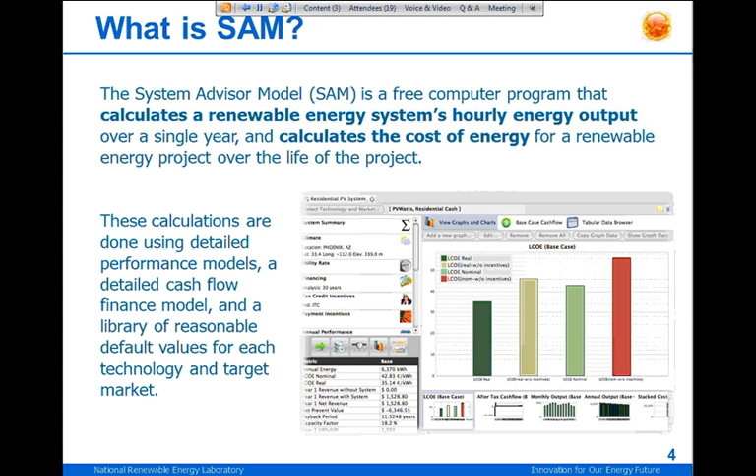So SAM is a computer program, and it's designed to model renewable energy projects, and it basically combines a performance model that calculates a renewable energy system's electricity production over a year with a financial model that calculates a project's cash flow over a period of several years. And using the results of these two models, you can evaluate the financial feasibility of a renewable energy project.

SAM can model a range of renewable energy technologies, photovoltaics, concentrating solar power, so parabolic troughs, power towers, and so on, and wind, which is what we'll be discussing today, and also geothermal and biopower systems. SAM's performance and financial models are based on, or adaptations of models that were developed either in the National Laboratory System at NREL or Sandia or others, or at some universities. And these models, before SAM was around, were basically used in-house as research tools, and SAM has made it possible for those models to be used by the general public.

And one of the main purposes of SAM is to make it possible to model different types of renewable energy systems using a consistent set of financial models. So you could compare a wind power system to a solar power system, for example, and know that the financial metrics that you're using to compare the two projects are consistent because you're using the same financial model with different performance models.

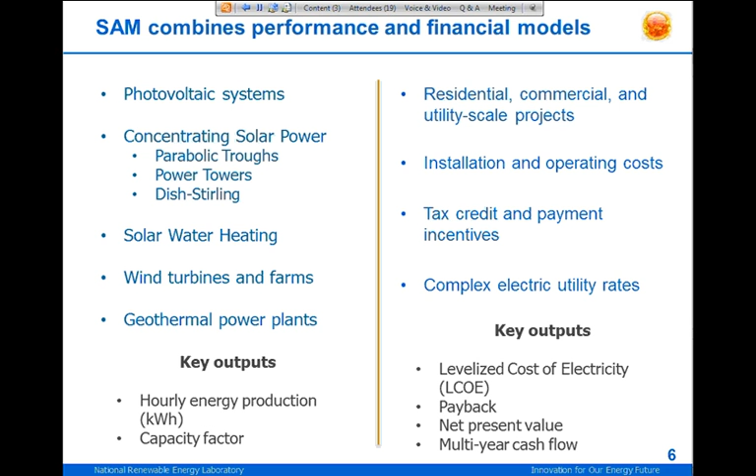This slide just illustrates the dual nature of SAM, that it has a performance model, which is here on the left side. This is a list of the performance models that are included in SAM. And then the financial model, which is here on the right side, shows you the kinds of projects you can model in SAM, so residential and commercial, and also utility scale projects. And then of course, the financial model handles project costs, incentives, debt structure, and those sorts of things.

So SAM is developed by the National Renewable Energy Laboratory with funding from the Department of Energy, and we partner with Sandia National Laboratories and other institutions. And we have well over 35,000 downloads of SAM by a range of different kinds of institutions and individuals.

Just in case you haven't done this yet, to download SAM, you go to the SAM website, sam.nrel.gov, and you have to register on the website before you can download SAM. To register, you just complete a short form, and then you can log on to the website and download. So when you're logged on to the site, you'll see a list of links to download SAM. Again, SAM is free, so there's no charge for downloading or using SAM.

All right, one more thing is we've got a bunch of resources to help you learn to use SAM and help you when you have questions as you're using it. The first line of defense is the help system in SAM. There's a help system integrated with the software. You can press the F1 key in Windows or this question mark button in the user interface to open the help system. The SAM website is also a good source of information about SAM.

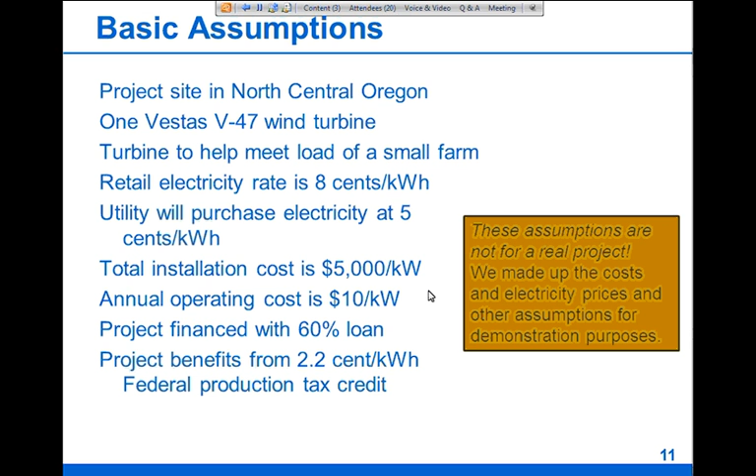I'm assuming an installation cost of $5,000 per kilowatt, and it costs $10 per kilowatt annually to operate the wind turbine. And then I'm assuming that the project is financed with a 60% loan, and that it can take advantage of the federal PTC. So these are the assumptions that I'll be putting into the model. So let me move this aside and get SAM up.

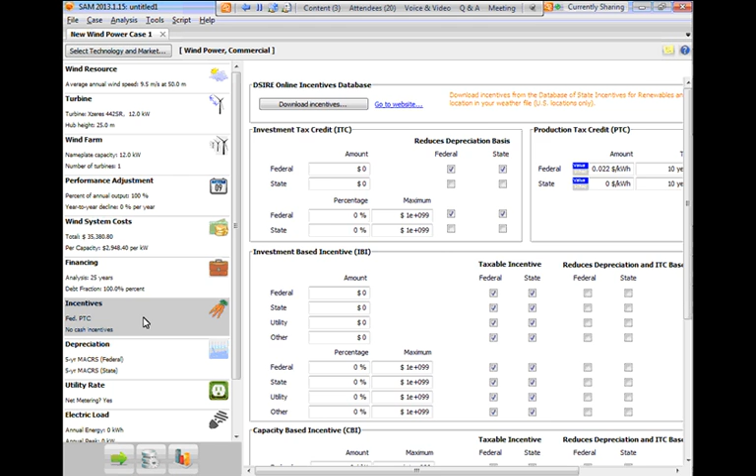So I have a case called New Wind Power Case 1 here. And on the left side of the window here is a navigation menu with buttons that you can click. And as you click the buttons, SAM displays different input pages. So you can see that there are a lot of input pages and that each input page has a lot of inputs. But you'll also notice as I'm flipping through here that all of the inputs have default values in them. So right when you start, from the time you create your file, you're actually ready to run a simulation.

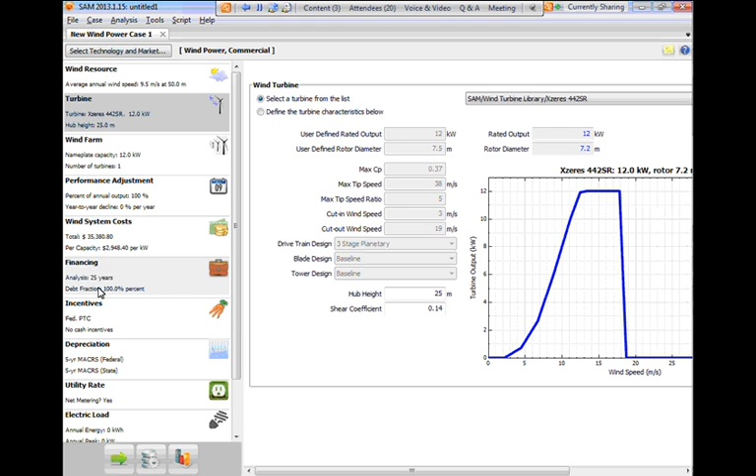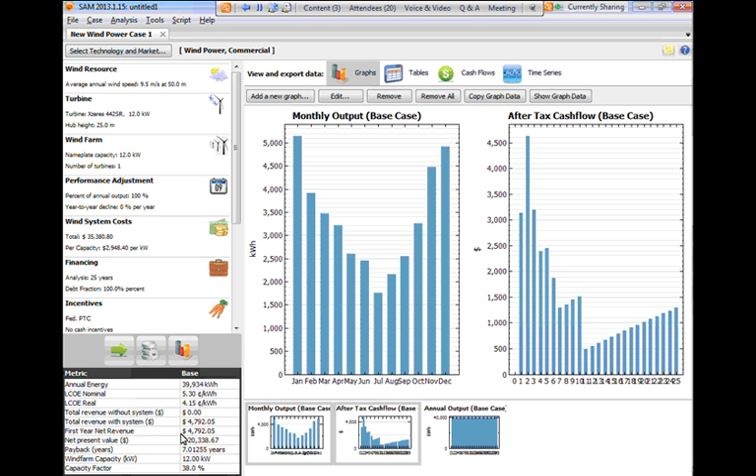So I can just click Run here, and I have results for the default commercial wind system. So I haven't entered any values here. I'm just working with the default assumptions, and get a system with reasonable results. So if you're just getting started with SAM, you can just start with the default system and start changing different inputs to familiarize yourself with them. And again, check help for details about what the inputs mean. There's a lot of information in help.

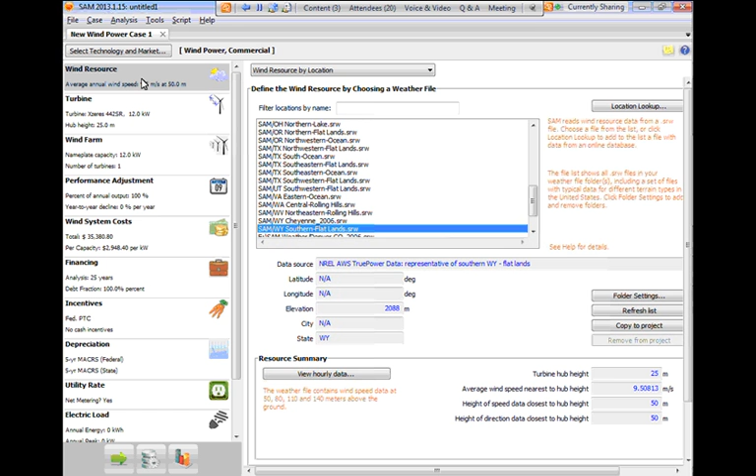Okay, so for our system, I mentioned that it's in north central Oregon. So I'm going to start at the top of the navigation menu with the wind resource button. This is where I tell SAM what wind resource data to use for the project. And I'm going to make the screen a little bigger here so you can see it. We've got a few options here for wind resource data. What I'm going to do is use one of the files that are included with SAM. These are what we call typical wind data files.

And they're data for specific locations in the U.S., but that we've sort of chosen to represent the range of types of wind resource that you might see in the U.S. So these files are okay to use for a very preliminary analysis before you've started collecting data, if you just want to get a sense of what the wind resource might be like at a given site. Obviously, you're not going to want to make any financial decisions based on these typical weather files.

For my example, I'm going to use the typical weather file. In Tom's example, he's going to use what we're calling now location lookup, which provides access to a different set of weather files. So you'll see that in a moment. It's also possible if you have your own wind resource data, if you have measured data, to create your own SRW file. So that's a text file with wind resource data in it. And there's instructions for how to do that in help.

So for now, for my system in Oregon, I'm going to type OR here to filter the files, or just show the files that have Oregon in their name. And I'm going to use this Oregon Northern Flatlands file, because that roughly represents the kind of terrain where my wind turbine is.

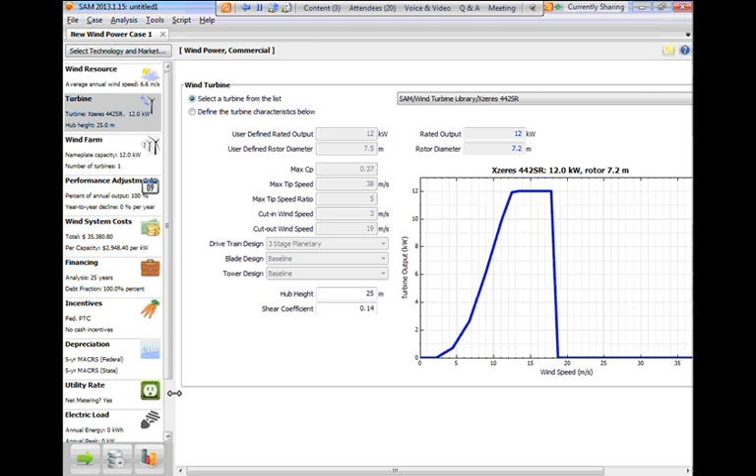All right, so now that I have my wind resource data specified, I'm going to pick a turbine. So I go to the turbine page. I'm going to use the select turbine from our list option, which is the option that you're going to want to use for most project analysis. And that gives me a list of wind turbines. And I mentioned that I was going to use the Vestas V47. So I'll go down here. There's Vestas V47, and that's all I have to do. I have the power curve of the wind turbine.

And you may have also noticed here that SAM displayed an error message in red. It's telling me that the hub height is too low for the rotor diameter. So this turbine has a 47-meter rotor diameter, and the default hub height is 25 meters. So the tower is shorter than the rotor. That's not going to work. So let me give it a hub height of 50 meters. And now the message goes away.

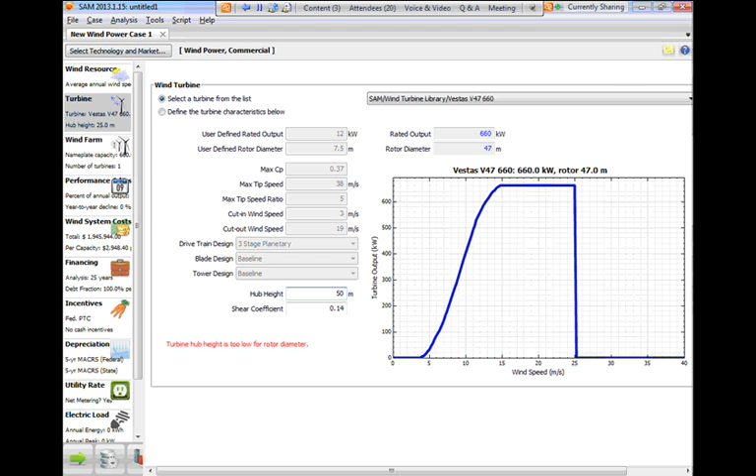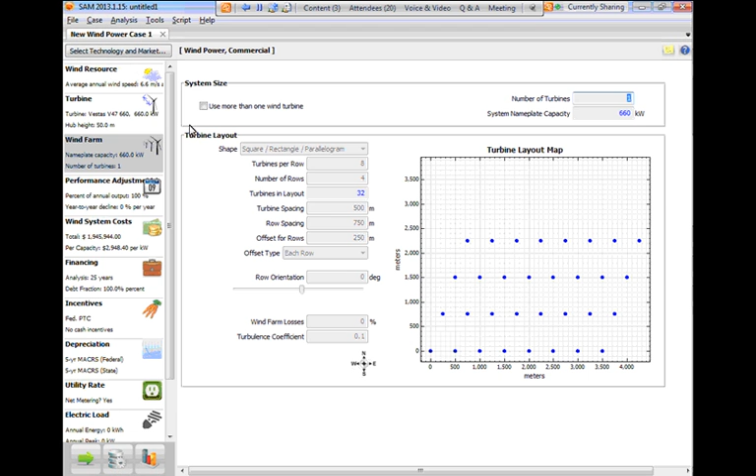And then I'll go down the list here to wind farm. This is a single turbine, so I want to make sure that use more than one turbine is clear. This checkbox is clear. Number of turbines is 1. And then I can just ignore the rest of these because I'm not laying out a wind farm. Tom, again, will show us how to do that when he models a wind farm.

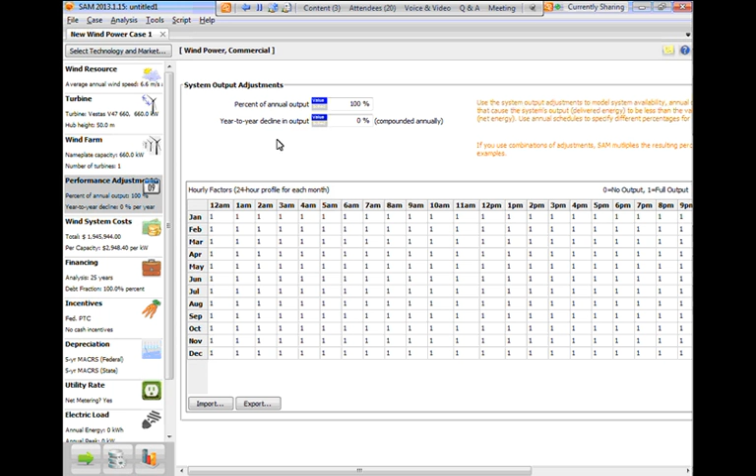The next set of inputs are these performance adjustment inputs. I'm going to ignore them for this example, but just so you know, these are here so that you can model the effects of curtailment. If you're required to shut the wind farm down during certain times of year by the utility, or to account for downtimes for maintenance and that sort of thing, you can use performance adjustment inputs to account for that.

All right, wind system costs. I'm not going to skip that. That's an important input. And the way we have the default set up for the commercial wind power system here is that we're just using a single cost to represent the project's installation cost. So you'll notice there's a bunch of categories here: turbine costs, foundations, infrastructure, and then we've got some indirect costs. And they're all set to 0 by default, except for the turbine cost.

So SAM only uses one number to represent the installation cost, and that's this total installed cost that you see down here under total installed cost. SAM calculates this number by adding up all of these different cost categories. And so it doesn't really matter how you assign costs to the different categories, as long as the total installed cost is what you expect it to be for the project. So to keep things simple, we've just used the turbine cost to represent the total cost, and then we've added an 8% contingency cost here.

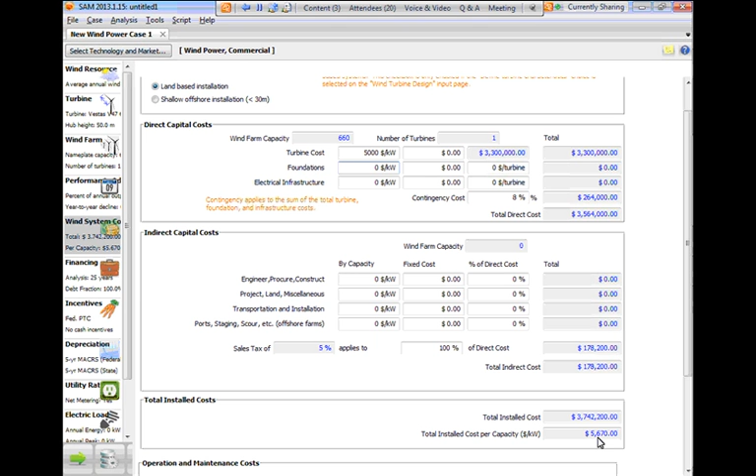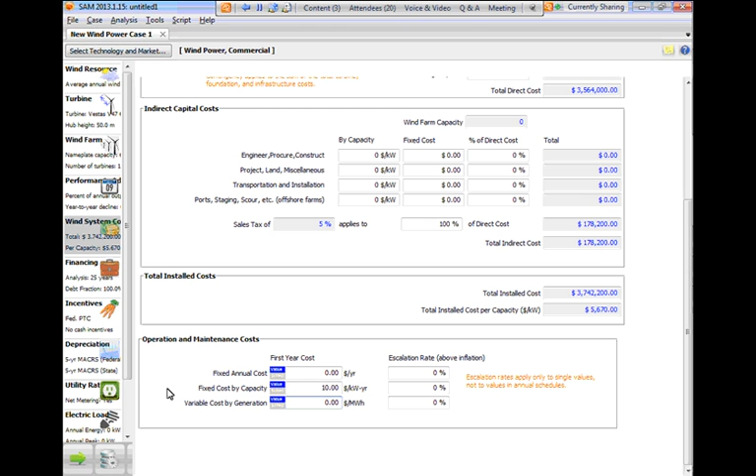So I said that the total installation cost is $5,000. And then that gives me a total installed cost of $5,670 per kilowatt. And then I also mentioned that the operating cost is $10 per kilowatt per year. So I'll put that down here. You can also enter O&M costs in different units, so as dollars per year or dollars per megawatt hour. Okay, so we need to tell SAM both what it costs to install the system and what it costs to operate the system. All right, so that's wind system costs.

Next, we go to financing. And here, the only detail that I gave about financing when I listed the assumptions was that the debt fraction is 60%. So it's a 60% loan. And for now, I'm just going to go with the default values for the other assumptions. Obviously, these are important and are going to vary from project to project. But just to get me started, I'll say I have a 60% debt fraction, and I'll use the 7.5% interest rate for the loan. And then we've got inflation and discount rates here, which SAM uses to calculate net present value and levelized cost of energy. And then I've got some tax assumptions here, and I'm just going to go with the defaults.

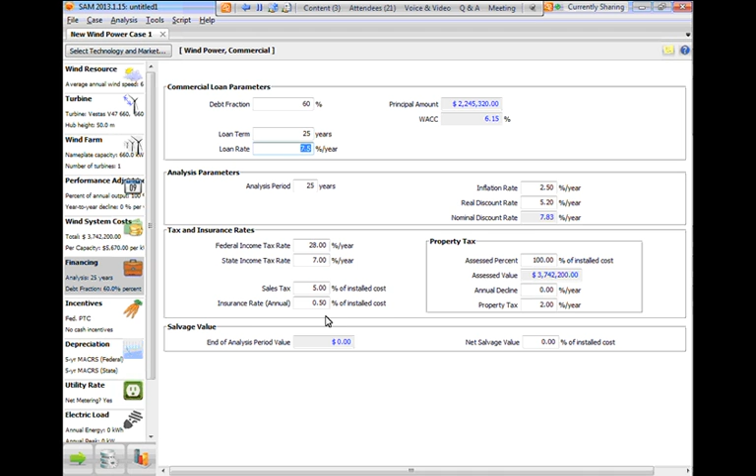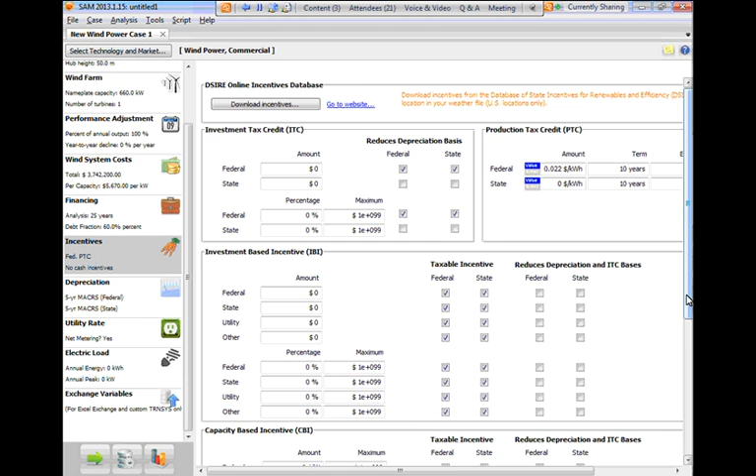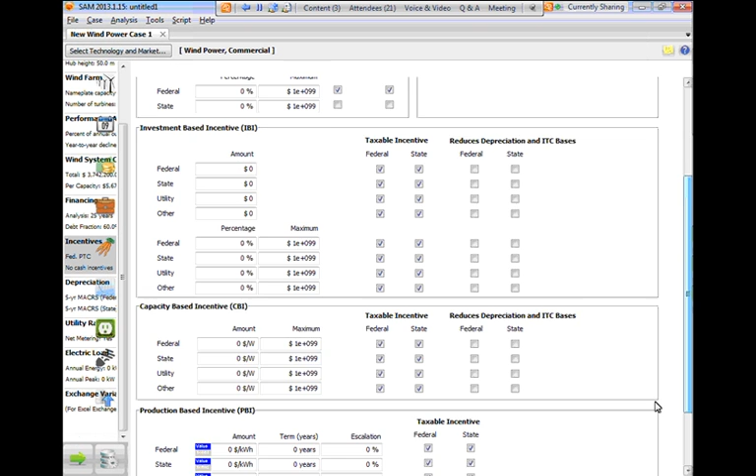And then for incentives, I said the project benefits from the 2.2 cent per kilowatt hour PTC. That's in there by default under PTC. And you'll notice there are inputs for a bunch of other incentives, which are all set to 0 by default. So for a project like this, a wind turbine on a farm is likely to benefit from a bunch of other incentives. There are probably state-level incentives. There may be federal incentives, for example, from the USDA that apply to agricultural facilities. The county may offer incentives. The utility may offer incentives. So you can put the whole package of incentives that the project can benefit from in these inputs. I'm just going to keep things simple now and assume that only the PTC applies.

Now, I want to take a quick moment here to talk about the DSIRE database. This is a website that lists renewable energy incentives for each state in the country and also for federal incentives. We can see the website by clicking the link here. Go to website.

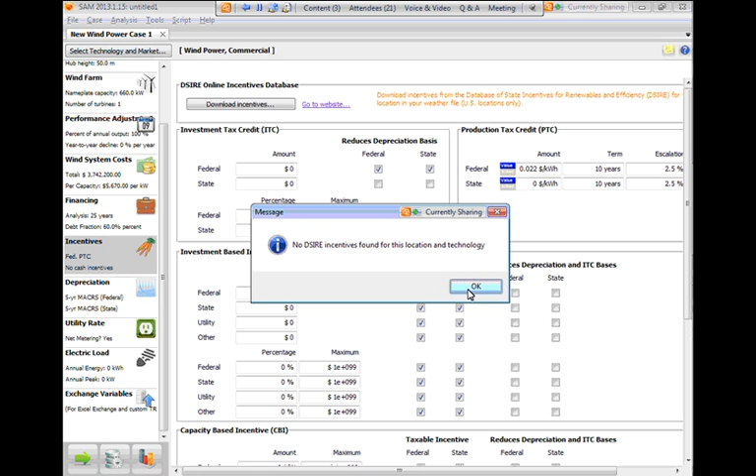That's SAM's way of telling me that it doesn't have location data for the type of weather file that I used. So when you click download incentives, what SAM does is it goes to the wind resource data and looks for the latitude and longitude to figure out where the project is. But since there's no latitude or longitude data in this particular data file that I chose, SAM doesn't have the information it needs to download the incentive data. So these typical wind data files that come packaged with SAM don't have location information. But if you use location lookup, as Tom will show you in a moment, then you will have latitude and longitude data, and then the download incentives button will work.

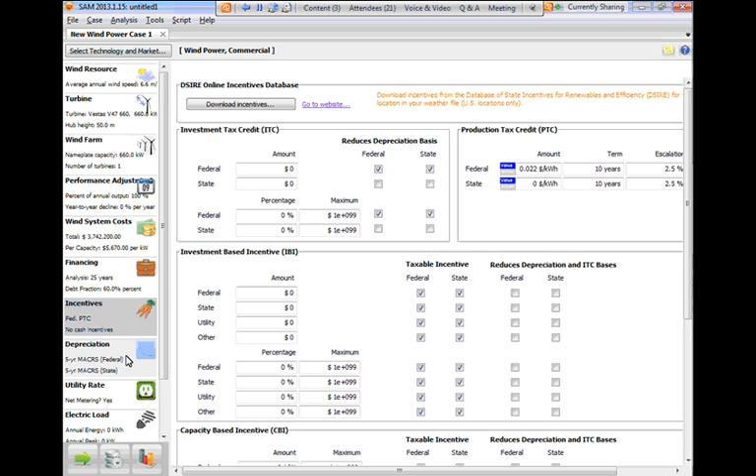All right. Next, let's look at depreciation. So that's the next window. And I'm going to go with the default. So this farm is a commercial entity, and I assume that it can take advantage of the accelerated depreciation under IRS rules. And we're just going to go with the 5-year schedule.

Okay, now we get to the utility rate. So remember I said this is a project that's buying and selling power at retail rates. So on the utility rate page, we tell SAM what the rate structure looks like. I'm going to use a simple rate structure, again, that I just made up. So I'm going to go through and clear all the checkboxes for these complex rates. I said that the farm buys electricity from the utility at 8 cents per kilowatt hour, and that the utility is willing to buy extra electricity that the farm generates at 5 cents per kilowatt hour.

Again, we have an automatic download from an online database feature for the utility rates. So if you click that button, then SAM tries to get in touch with a server, which it often can't do on its first try. So if you get that message, you just try again, click refresh, and usually it comes up the second time. There we go. There's a list of all the utilities in the United States, or at least a whole lot of them. And if I filter the list there by typing Oregon, there's a list of utilities that happen to have the word Oregon in their names.

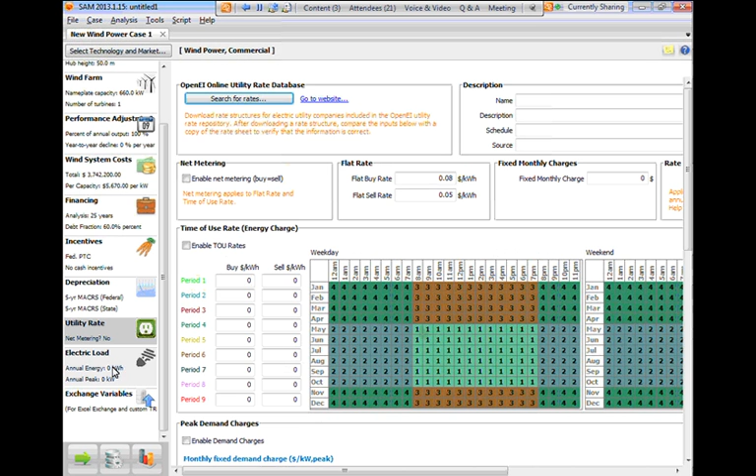If I'm modeling this kind of a system, since I've got a different buy rate and different sell rate, I need to give SAM some information about the electricity usage of the farm. So that I do on the electric load page. And I'll be the first to tell you that the electric load page is a little tricky to use. So if you're working with electric load data, feel free to get in touch with us via the forum or by email. I'm going to show you how to work with one of the sample load files that we include with SAM.

So here goes. And I'll also mention that for the steps that I'm walking through here, obviously you'll be able to refer to the video when we're done to look back at what I'm doing. But I also will be posting a PowerPoint presentation that kind of steps through what I'm going through here. So don't worry too much if you're not following all the steps. I'm about to launch into a bunch of complicated steps.

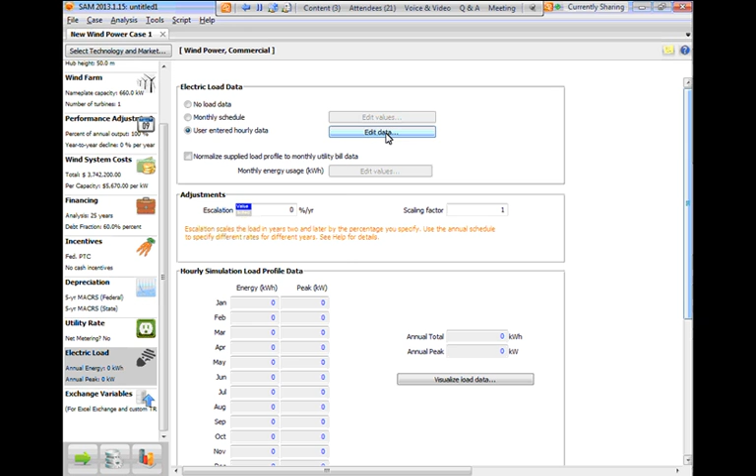To load a file of load data, I click user entered hourly data here, and that makes the edit data button active. So then I click edit data, and then I click import in the edit data window, and I navigate to this folder in the SAM installation folder. So by default in Windows, SAM installs itself in C:\SAM

2013.1.15. And then in that folder, there's a folder called Samples, Simulated Electric Load Data, and it has a bunch of text files. These text files are just a single column of hourly electric load data in average kilowatts per hour. And I'm arbitrarily here going to choose Medford. I think Medford is the town in Oregon, so I'll just use it for fun here.

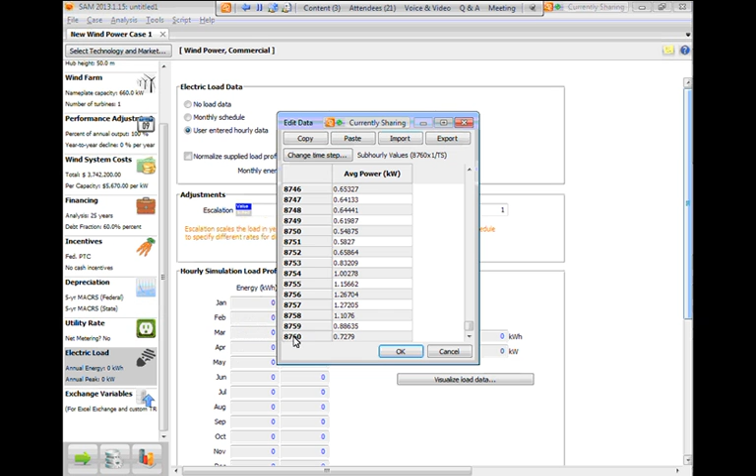Basically, in order to model load data in SAM, SAM needs a set of hourly data. So I need some kind of hourly data file to use. So I'm just going to use this Medford text file. There's the hourly data from the file. So you can see it goes all the way to 8,760, which is the number of hours in a year.

When I click OK, then this table of monthly values is populated. So I can see the monthly energy and monthly peak load. And then I see the annual totals here. Now my farm has a much bigger load than this. So I'm just going to scale this hourly data up by a factor of 100. So I put 100 as a scaling factor. Whoops, not 1,000.

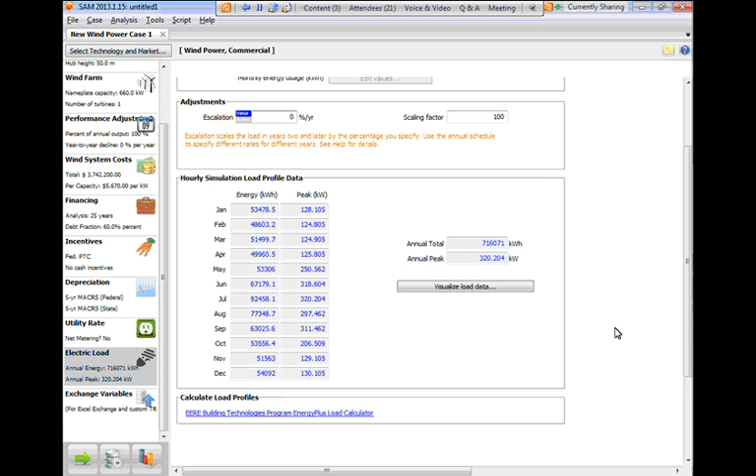And now the annual peak is 320 kilowatts, and this farm consumes 716,000 kilowatt hours per year. I'm going to just use that as a first approximation of the farm's load, and call things good. So now I've put in values or reviewed the values on each of the input pages. I'm ready to run, and this green arrow button is the run button. So I click run, and SAM just did a year's worth of hourly simulations and displayed some results.

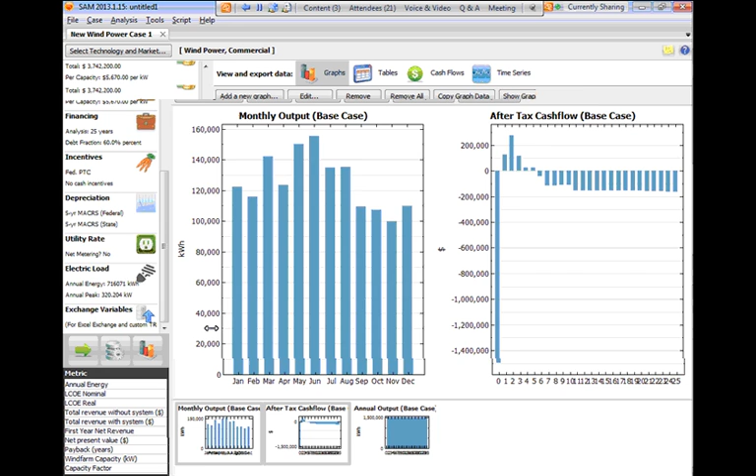So down here under the run button is what we call the metrics table, and this is a summary of the results from SAM. We also have graphs and tables of data. So right now I'm looking at graphs, and we've got a graph of monthly output and a graph of the cash flow. I can click the thumbnails down here to show the graphs one by one. Control click to choose more than one graph. But the monthly output and after-tax cash flow are kind of a good summary of the system's performance.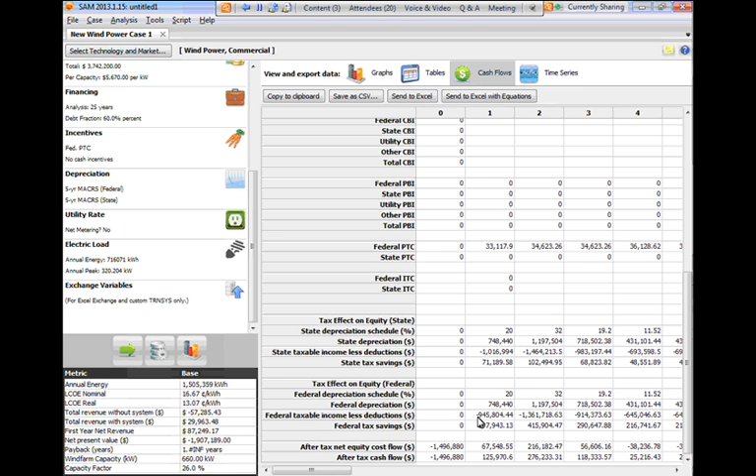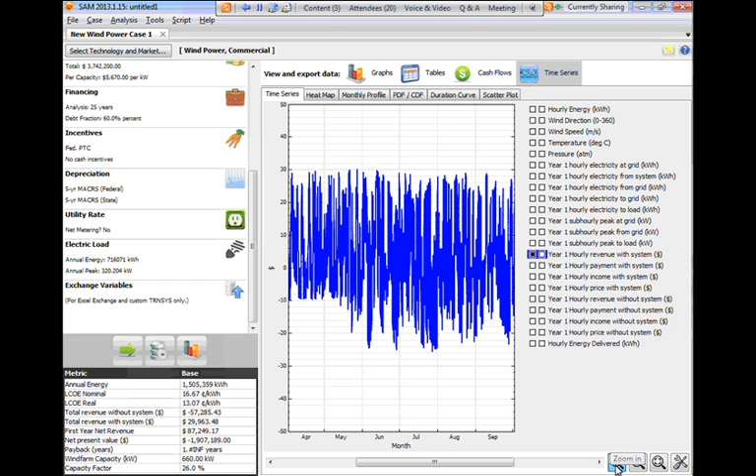If I want to dig into more detail, I can look at tables and expand the list to show different outputs. There's a cash flow table here. This shows the detail of the project cash flow, so I can see what's going on with my cash flow. And then the time series graph shows graphs of the hourly data. So I can choose a variable, zoom in, look at the data in different formats. So I encourage you to play around with these to see. There's lots of different ways to show results in SAM.

And in general, you can right-click graphs to export images of them if you want to put them in a document or a presentation. You can also export data using these copy to clipboard or send to Excel buttons. So there's lots of different ways to get your data out of SAM and into other applications.

So let's look at our results here. So this Vestas 660 kilowatt turbine produced about 1.5 million kilowatt hours in a year, and I have an LCOE of 13 cents per kilowatt hour. And the total revenue for this system is about $30,000 per year. The revenue without system is basically what I would be paying for electricity without the system. So my net revenue is the difference between the two. And then I have a negative net present value, which is not a good sign.

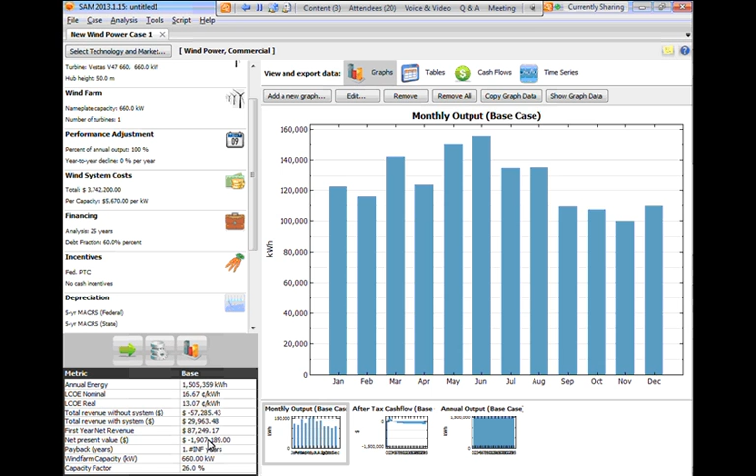If I look at the cash flow graph, I can see that my initial cost here in year zero, I have a big negative here in year zero, and I have a little bit of positive here in the first 5 years. This is from accelerated depreciation. And then in the out years, I'm basically not getting enough revenue to meet the cost of the system. So I have a negative net present value.

And I also have this strange number and letters in payback, which is telling me that the payback is longer than my analysis period. I have a 25-year analysis period, and the payback is longer than 25 years. So based on my assumptions, this project doesn't look very good.

So what I want to do now quickly is to show you how to do a parametric study. I'm going to do it on the system cost. So my turbine cost is $5,000 per kilowatt. I want to look and see what happens over a range of turbine costs. So I'm going to go through these steps quickly, but you can get step-by-step instructions and help on some of the other videos on the learning page of the website. So go to parametrics, click Add Parametric Simulation, Add Turbine Cost.

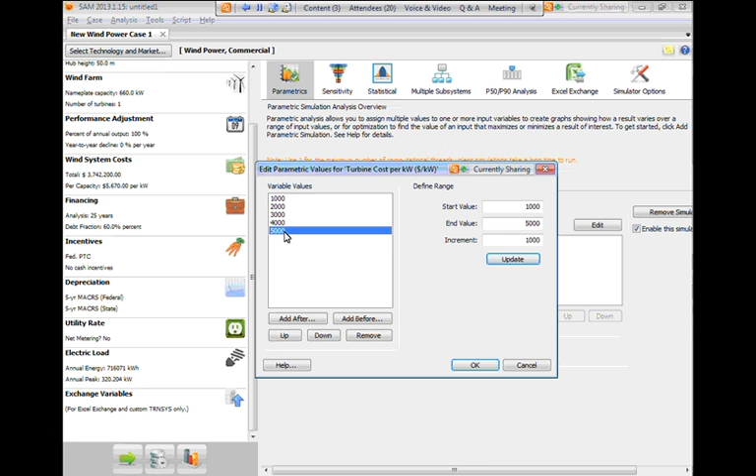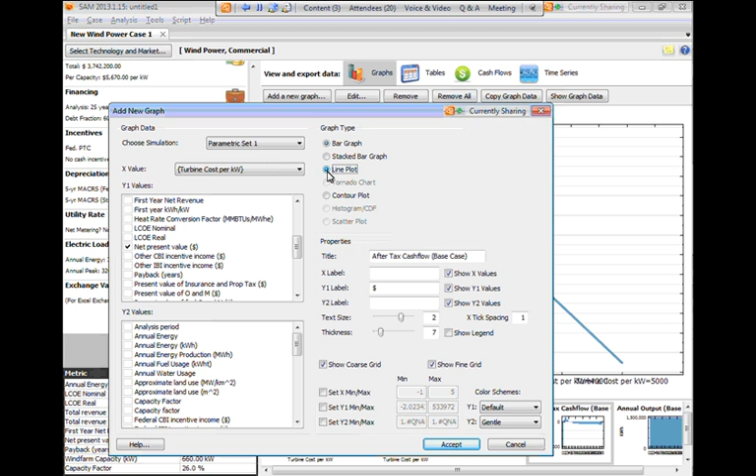Okay, and what a parametric analysis allows me to do is to put in a range of costs, a range of values for any input variable. So now I'm going to model my project with 1, 2, 3, 4, 5 different turbine costs. Okay, so there's my 5 simulations. And then I want to plot a graph of net present value versus turbine cost. Okay, I'll make that a line plot, and I'm going to get rid of my labels here.

Okay, so what this shows me is that I've got turbine costs on the x-axis, ranging from $1,000 per kilowatt to $5,000 per kilowatt, and I can see that this is net present value on the y-axis in dollars, and I can see that the net present value line crosses zero at somewhere between $1,000 and $2,000 per kilowatt. So what that tells me is for this project to make sense financially, I need a turbine cost of less than $2,000 per kilowatt.

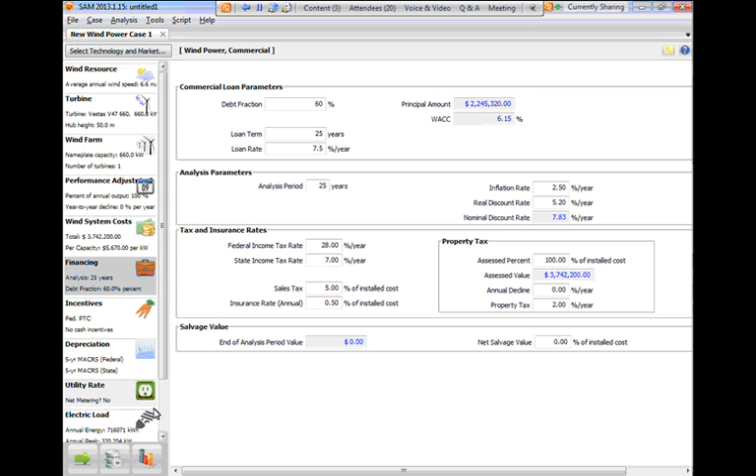So that means I need incentives. I either need incentives or I need to buy a cheaper turbine, or I need to do something to get the turbine costs down. Obviously, I could change other assumptions. I could look at a different wind resource regime. I could change some of the other financial parameters. But if I only look at turbine cost, this graph gives me a picture of the impact of the turbine cost on the project feasibility.

If I go back and change the system cost to, let's say, $1,000 per kilowatt and run, now my metrics table shows a positive NPV, a payback period of 6 years. So that's a much more reasonable looking project.

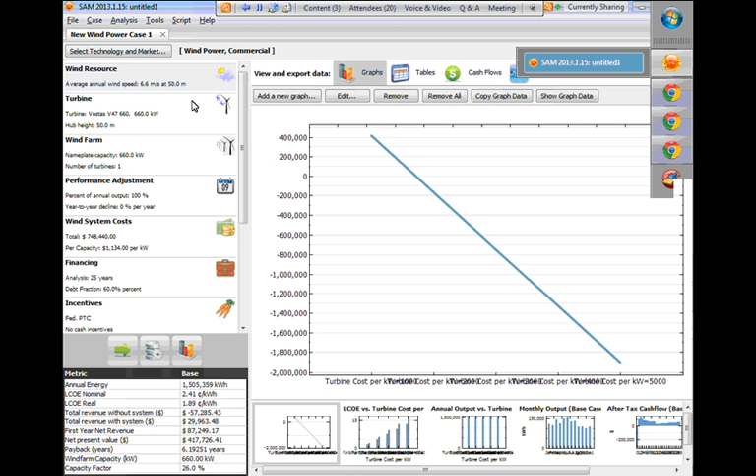Paul has done a great job of introducing a lot of things that are very similar, so I'm not going to repeat any of the basic things he said. I'm going to sort of highlight things that are maybe different about doing a wind farm versus a single turbine.

And we actually think that we can get a 10% bonus during peak periods in the summer. So I'll show you how we could maybe model that too. The total installation cost per kilowatt is going to be just under $2,100. And the operation and maintenance costs $50 per kilowatt per year. And we expect this project as well to get started in time to take advantage of the

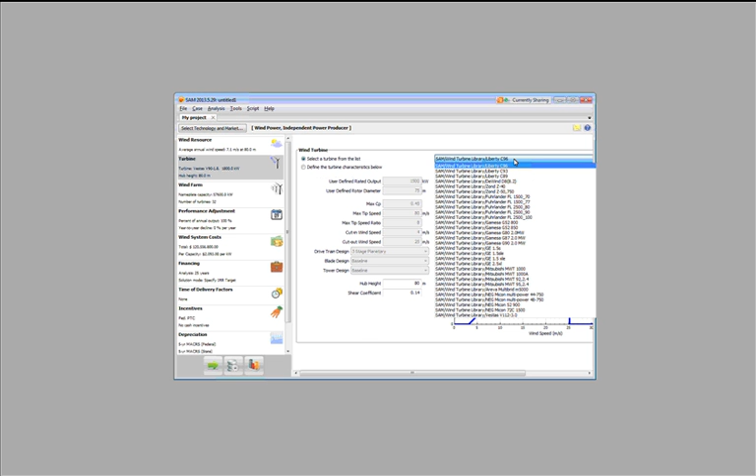So the turbine, I said I was going to use a 1.5 megawatt GE, so I'll go find that from the list. Paul, again, has done this already, so I'm not going to go into details, but you can see that I've chosen it from the list. If you just click the up and down arrow on here, it'll update these graphs immediately on my screen or on your screen if you're running it. Probably takes a little while over the webinar. But you can see exactly what they are, and you can flip through them all very quickly.

Incidentally, I want to bring up a certain point about SAM and the wind model in general right now. This option here is for sort of designing your own turbine. You can see here, if I change this, I've modified the whole power curve here. In general, this combined with a couple of other options on different pages. Let me go back real quick. See, this option here lets you input power and wind resource in a different way.

These are part of a sort of R&D, you might call it not sub-model, but modeling capability within this model. We wouldn't generally say that most users are going to want this. It's here mostly for NREL R&D people to use. So although all these things take up a big part of the screen, we don't expect people typically to use them. If you're into the R&D of turbines, please contact us and ask for help, and we can maybe help you use this. But don't expect to use those things very often.

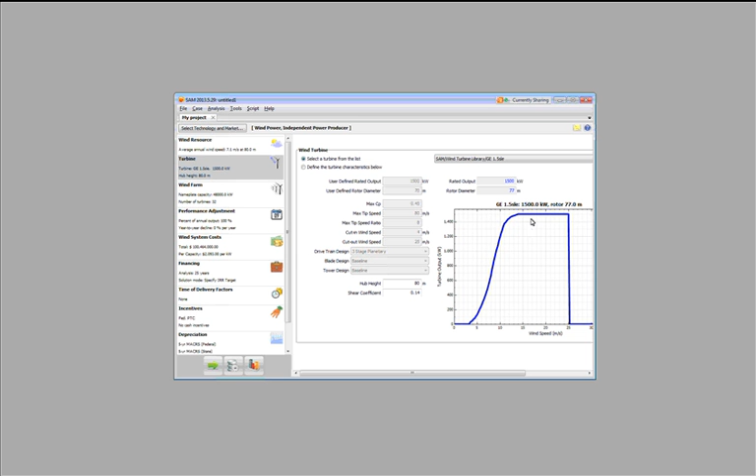So we're going to stick with this GE 1.5 and use its standard turbine in the library. Incidentally, also, the library is relatively simple. It's just a text file with a bunch of numbers in it. You can relatively easily add your own to it. So if you need help, contact us, but it's relatively straightforward.

So then the next thing is to implement the wind farm. Right now, SAM will only let you choose from certain geometric shapes. In the near future, actually, I'm expecting to change the code to allow you to input your own XY coordinates so you can put in whatever farm you want to. That's probably going to change in the next couple of weeks, and then it'll be on the next release, which might be later this summer or fall. So we make sure this is checked so that we can use these inputs.

And I said I wanted to have 30 turbines. I'm going to have 10 turbines in 3 rows. Now, in southeastern Wyoming, the wind is typically coming from the west, so you'd probably want to orient this thing to catch wind from the west as best as possible.

So you can change the orientation here. And in this part of the country, I'm not sure if you've been there or not, but there's a lot of ridges, and oftentimes these are installed on tops of the ridges as best as possible. At least you would if you could. So to make this long and skinny, what I'm going to do is offset the rows. Instead of just a little amount, I'm going to offset it by a larger amount.

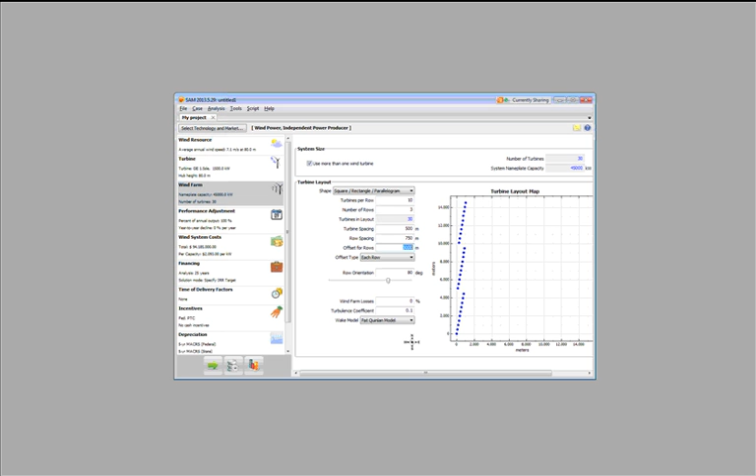And there. So now, if our ridge happens to be going the other direction instead of going up like this, it's going maybe back or something like that, you can offset by a negative number and you'll get something that looks like this. So there we have a farm that's oriented on top of a ridge, with the wind we expect to be coming from slightly north of straight west, so that we capture it as much as possible with as few turbines being in the wake of the turbines in front of them.

Incidentally, you could, like Paul showed, do a parametric on the orientation of the farm and see if it maximizes. Having played with it, it doesn't seem to change a lot unless you really orient this thing so that the wind is always coming straight down the row.

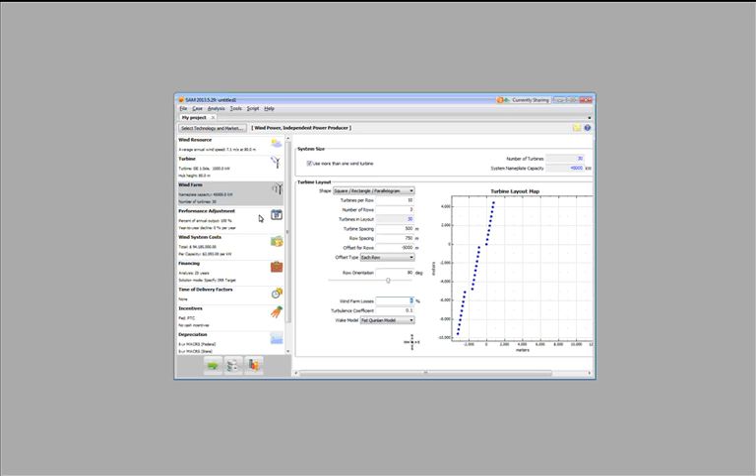So for farm losses, I'm just going to put in 5%. SAM uses the turbine layout actually to do wake losses. It calculates its own wake losses. So it's doing a relatively simple analysis as the wind flows through the farm of what turbines are behind what other turbines, and it's adjusting their losses accordingly. So don't include your wake losses here. So I'm just putting in a number to start with here. It's sort of an arbitrary number, 5%. The performance adjustment, Paul already talked about this, so I'm not going to go through it in detail.

Wind system costs. I'm going to accept the defaults here, which work out to be, let's see, about what I said. So this one has all the details filled out. These numbers come from some reports from NREL, so these are what NREL thinks are reasonable assumptions. Again, it's not for a specific project, it's for a general project. So I guess the value, again, that Paul mentioned is the main important one, which is total install cost, which you can divide by kilowatts to get the cost per kilowatt.

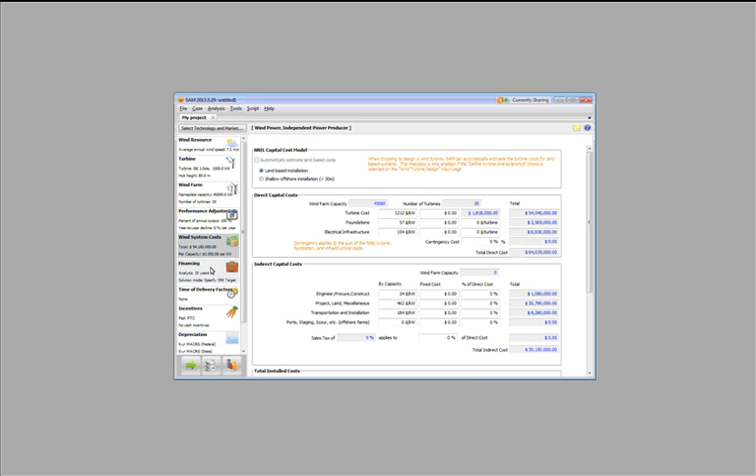So having cost per kilowatt would allow you to do a parametric on the size of the farm, for instance. If you wanted to do a parametric on different numbers of rows or different numbers of turbines, then having the cost per kilowatt means the cost would scale up automatically. And SAM will do that. So I'm going to accept these defaults. They're fine with me.

For this one, we said we had a PPA price. We expected to get about $80 a megawatt hour, and we're going to see what the IRR is. So I'm going to type in the $80 or 8 cents per kilowatt hour, and then we'll see what internal rate of return SAM calculates. I think there's one more thing that I wanted to do here, because I'm not going to go into the depreciation. I'm going to accept the default depreciation and incentives.

But the time of delivery, so we said we had a bonus for delivering during peak hours. Let's assume that the peak hours in the Wyoming and Colorado area are the summer months from 1 to 6. What I can do here is say, okay, during those times I get a little extra revenue. I said 10% extra. So first I want to change this second period number, which right now is 1, but I'm going to change this to 1.1.

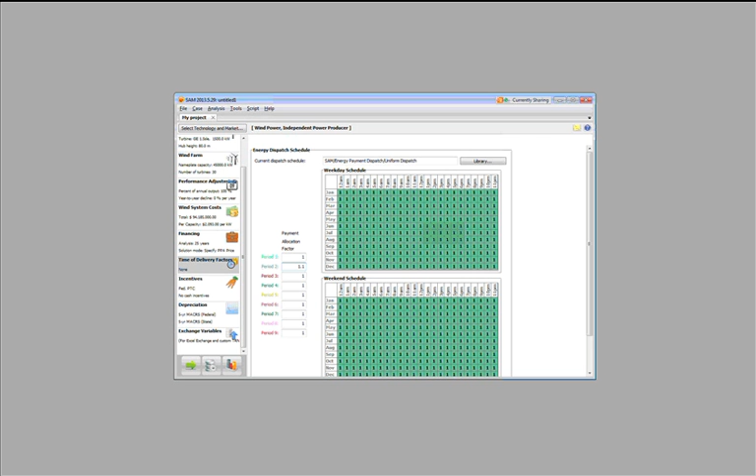Oops. Not 11. 1.1. And then the way I tell SAM to use this is I highlight what I want, and then just type the number 2. And that changes all these to 2, so that during these times, SAM will be using this factor instead of just 1. And then I'm ready to run this. So see where we get. Let me move this over.

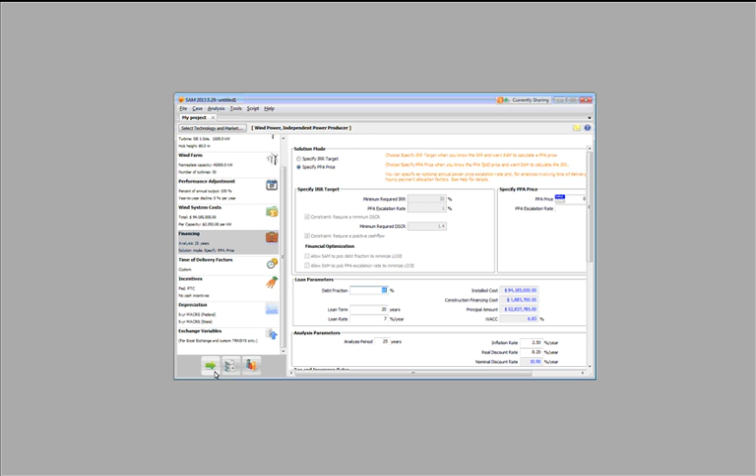I can do it very quickly by going up here and saying, well, no, it's not 50%, it's 55%. And then run it again since it runs very quickly. Okay, so now we're at 12.9. So somewhere between 50 and 55, the internal rate of return went over 12%, and you could do a parametric, as Paul showed, to decide where exactly that happened.

Or you can do a parametric on other things. You can do a parametric on different efficiencies of the wind farm assumptions that I put in for 5%. Maybe we could run it from 3 to 7% or whatever, and find different answers for those different input assumptions.

So since Paul went through, and we're about 10 minutes till, and we wanted to have some time for questions, I'm going to stop here since Paul has already talked about the cash flow and everything. And he's allowed people to ask questions about any part of this. And if we don't have questions right away, Paul wanted to talk about a few other topics, some more advanced topics like the parametrics that we can show people. Or if people have detailed questions about a specific thing, we can go into that too.

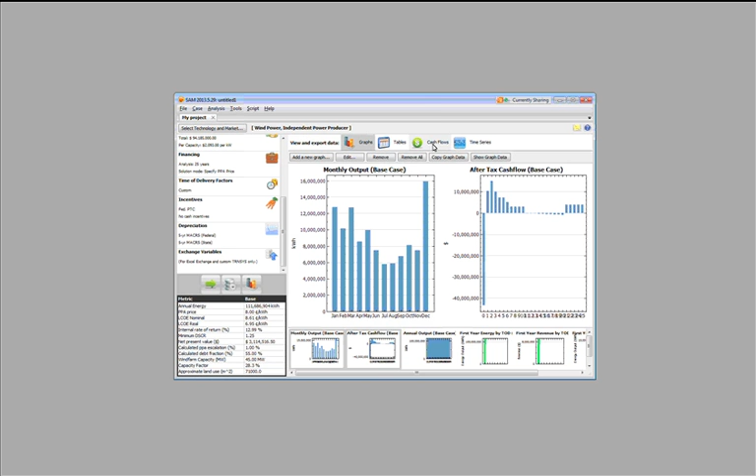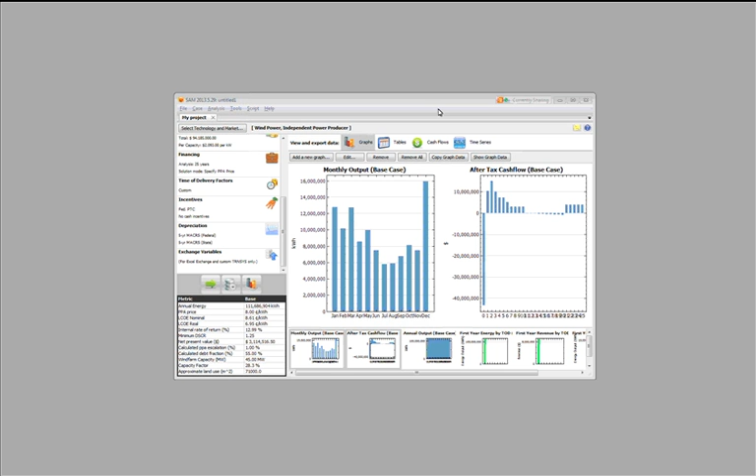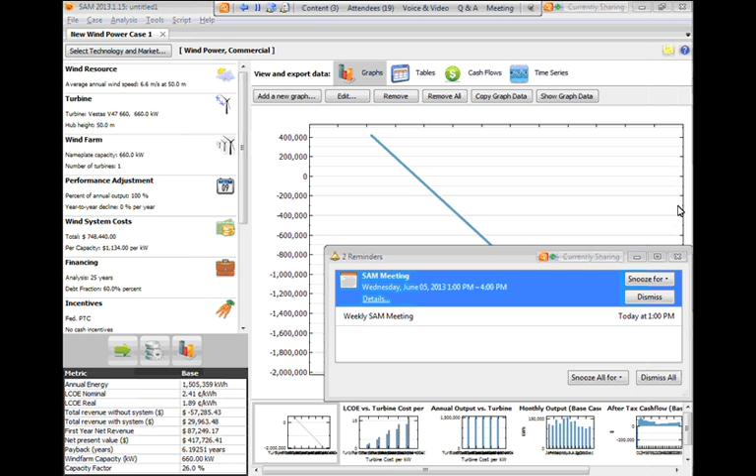So there's a question about where to get reasonable estimates for installation costs and O&M costs. That's a question that we often get, and unfortunately one that we don't have an excellent answer to. I can refer you to a couple of resources, the first being on the SAM website, under resources, there's system cost data. As we become aware of publications with information about costs, we post links to those documents here. So we go down under wind. There's some references here, and these tend to be high-level analyses of costs throughout the U.S.

The American Wind Energy Association, AWEA, and some other organizations also have information about costs. There are a few different websites that have pretty good documentation of costs for small wind, and often state energy offices in states that are actively promoting renewables have good information on their websites. Of course, the NREL publications database is another good source of information on research that NREL is doing on costs.

Unfortunately, there's not a place where you can go to find out how much it's going to cost to build your particular project, because actual costs depend a lot on particular vendors and the kind of entity that you're representing and so on. So there are a lot of factors that affect specific costs of a project, but some of these resources can help you get started with preliminary analyses.

So if you are just running one turbine, though, and you have the wind speed, you can just fill a column full of zeros or ones to make up the direction, because it's unused anyway. So you could do a single turbine analysis by just having 3 columns of made-up numbers and 1 column of wind speed.

Yeah, thanks, Tom. And this is just what the SRW file looks like. It's a text file with a few rows of header data and comma-separated values. And it's a pretty flexible format. It's described in help, but you should have at least a set of pressure, temperature, direction, and speed data at one height at least, and then at more heights, preferably.

So it's pretty easy to create one of these files or to modify one. Yeah, it's almost a default from Microsoft Excel. If you choose to save something in Microsoft Excel that has comma-separated values, then you'll get just about that if it has that data in it in the cells.

Okay, and then here's the description of the different weather file formats that SAM can read. And SRW is hopefully down here somewhere. There we go. So we have a description of the format and units and so on.

Yeah, as a matter of fact, we wrote the format such that if you change the file name from SRW to CSV, Excel will open it, you can look at it, and then you could change the numbers right there in Excel, and then save it as a CSV and change the name back to SRW, and I think you'll be in good shape. It'll be almost perfect.

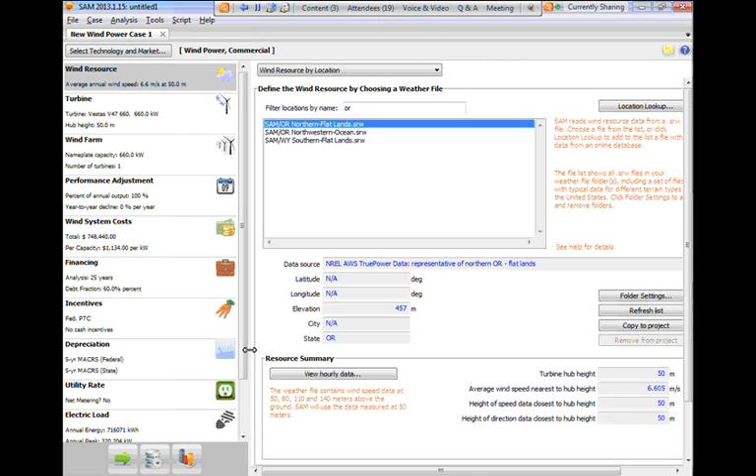And while we're waiting, Tom mentioned that you can look at your resource data by clicking the View Hourly Data button here. So this shows you the data that's in the particular weather file that we're looking at. It's got data at 50, 80, 110, 140 meters, and you can see there's temperature, pressure, direction, and the wind speed at each height.

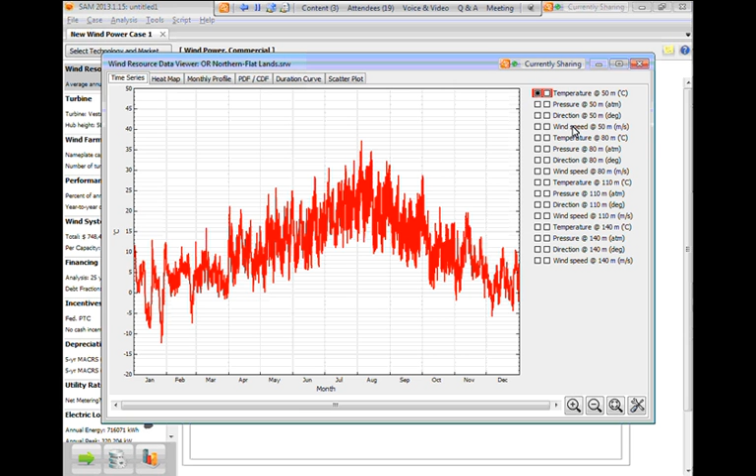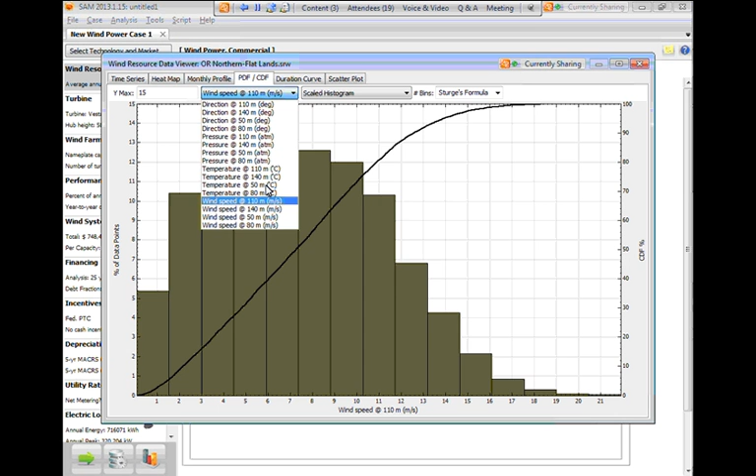And you can use these checkboxes to plot the data. We can look at a PDF of the wind speed, and so on.